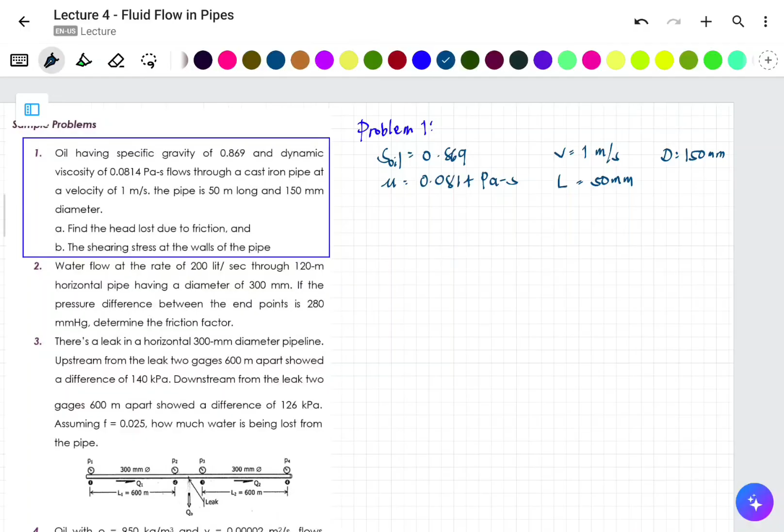Now, the first thing asked in the problem is head loss due to friction. But there are two cases for head loss due to friction: first is laminar flow, and second is turbulent flow. So first, let's find the value of the Reynolds number.

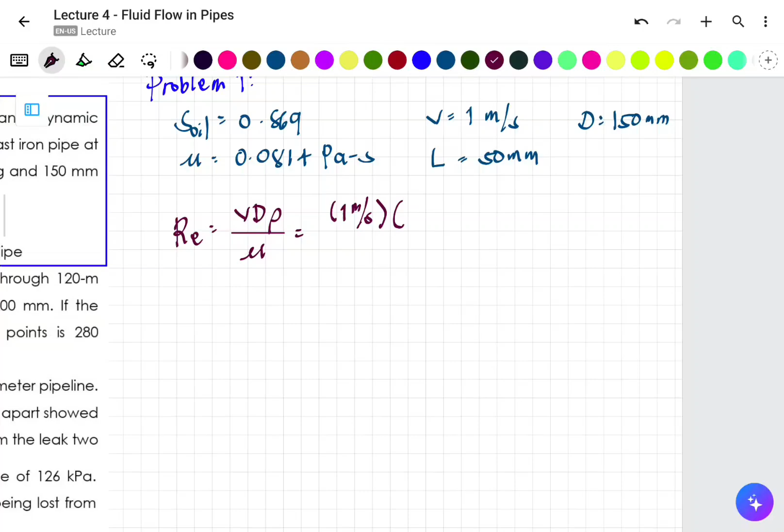The Reynolds number formula uses mu or absolute/dynamic viscosity, velocity, diameter, and density, that is V times d times rho over mu. From our previous discussion, mu is the absolute viscosity. The velocity is 1 meter per second, the diameter is 0.15 meters since the pipe is circular, multiplied by the density of the oil, which is 1000 kilogram per cubic meter for water, but we're given a specific gravity of 0.869, all over the absolute viscosity of 0.0814 pascal second.

The resulting unit here is dimensionless, because from the derivation of the formula, if we convert the values into their corresponding units like Pascal or Newton per square meter, we know that the units cancel and the Reynolds number value is dimensionless. That value is equal to 1,601.351.

That is less than 2,000, our parameter. Therefore, this is a laminar flow. For laminar flow, we know that the value of F is equal to 64 over the Reynolds number.

So F is equal to 64 over the computed Reynolds number of 1601.351. Just input this into your calculators. So to avoid rounding off too much, this is equal to 0.03... let's continue with 0.04 since it's about 0.0399-something, or 0.04, that is the coefficient of friction since this is laminar flow.

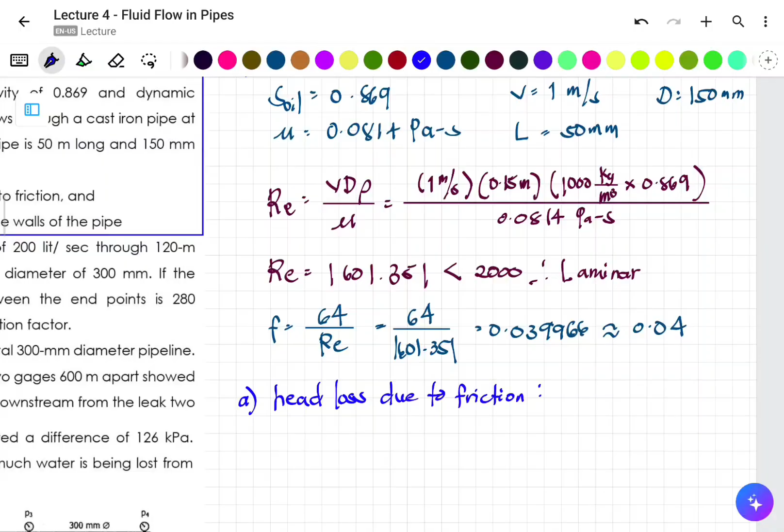Using the formula 0.0826 F L Q squared over D raised to the 5th, or we can also use the general formula. Let's use the general formula: H sub F, or head loss due to friction, is FL over D, multiplied by V squared over 2G. This is more of a direct substitution now.

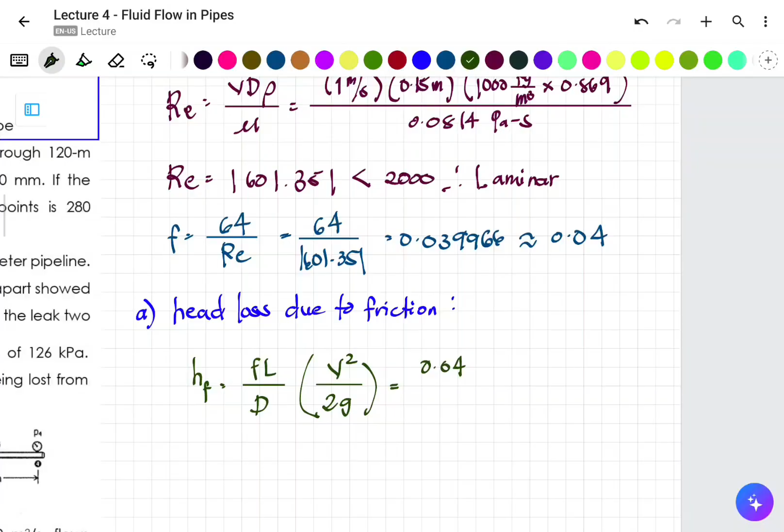Given to us, F is 0.04 - I rounded up since the decimal value is 0.0399, very close to 0.04, so it's acceptable. The length is 50 meters, over the diameter of 0.15 meters.

Multiplied by V squared, the velocity of 1 meter per second squared, over 2 times 9.81 meters per second squared. So once we compute this equation, you may use your calculator to store the value for speed.

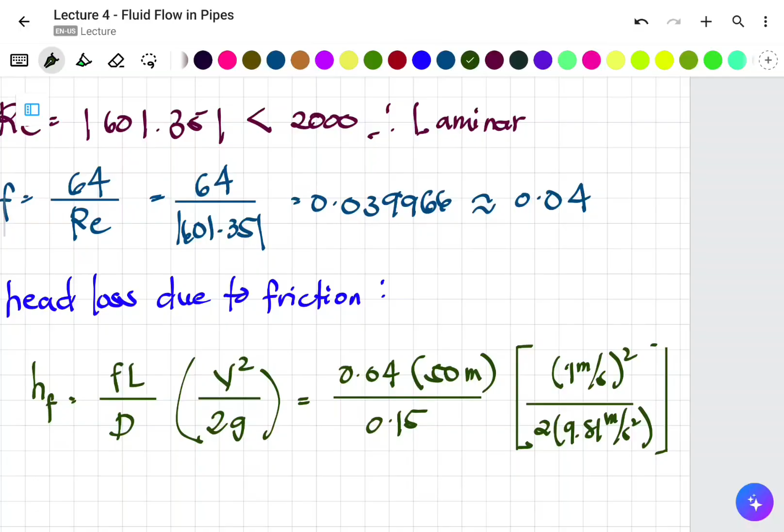If you want a value that doesn't round off, that's the catch there. It shouldn't round off. So our value for head loss, this value is in meters. So our H sub F in meters is 0.0679, or about 6, or in 2 or 3 decimal places, that's 0.068 meters. So if in millimeters, that's 68 millimeters. So that's how small it is.

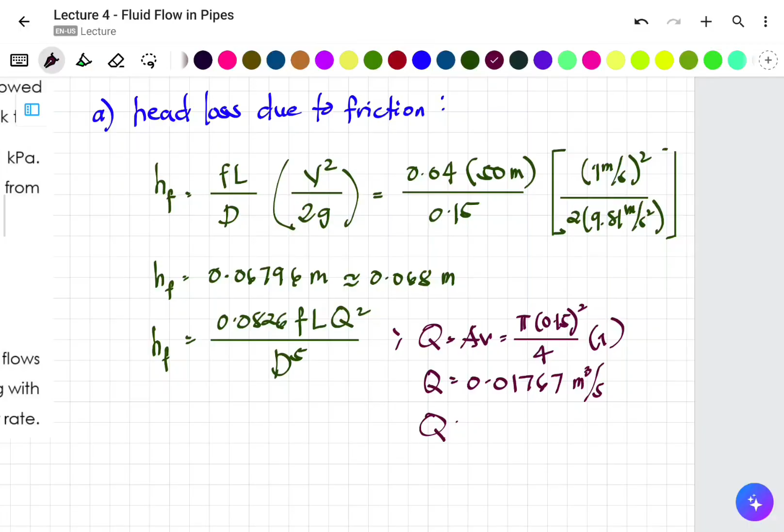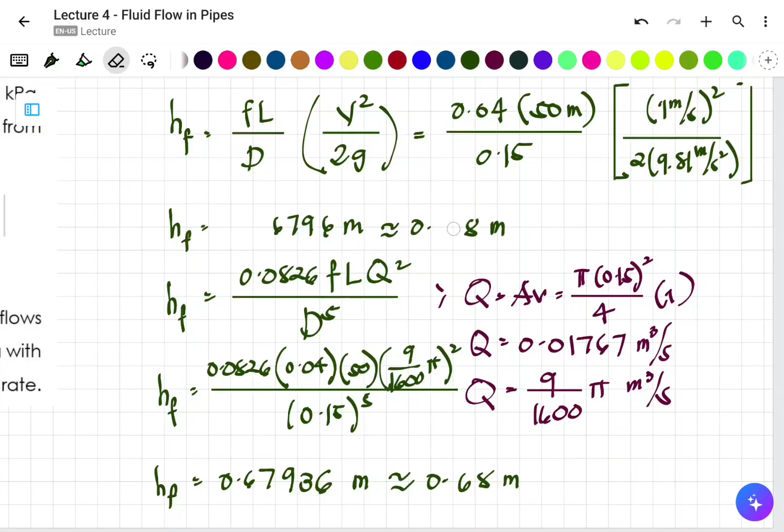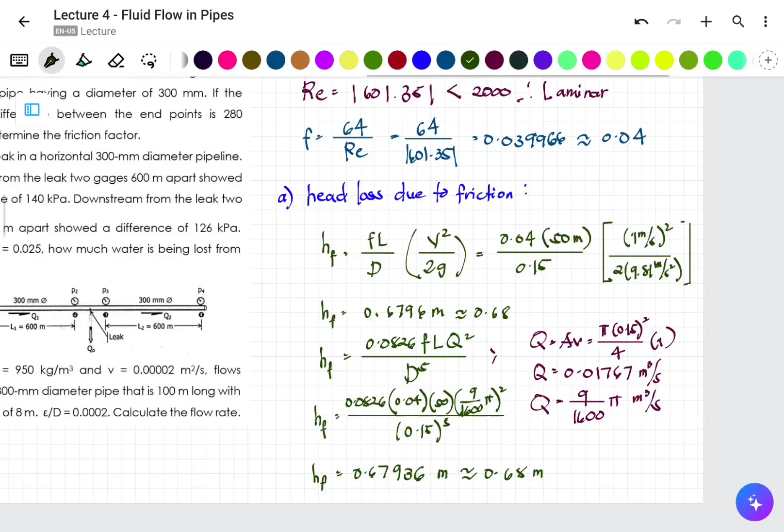Okay, so either of the two works, if you want to use our general equation, that's fine. If you want to use the equation for circular pipes, since it is circular, that also works. The only difference is you'll still need to compute the value of Q, because without it you can't go directly to our formula—if there's no Q value, you'd still need to solve for it. Okay, so same, same answer: 0.68 meters. That's for letter A.

Now let's solve for letter B. So for letter B, what we're looking for, still the same problem—now letter B: we need to find the shearing stress at the walls of the pipe. So we know that for letter B, when it's at the walls of the pipe, we use the notation tau sub O. And tau sub O, from our previous discussion, is gamma H sub L D over the denominator 4L.

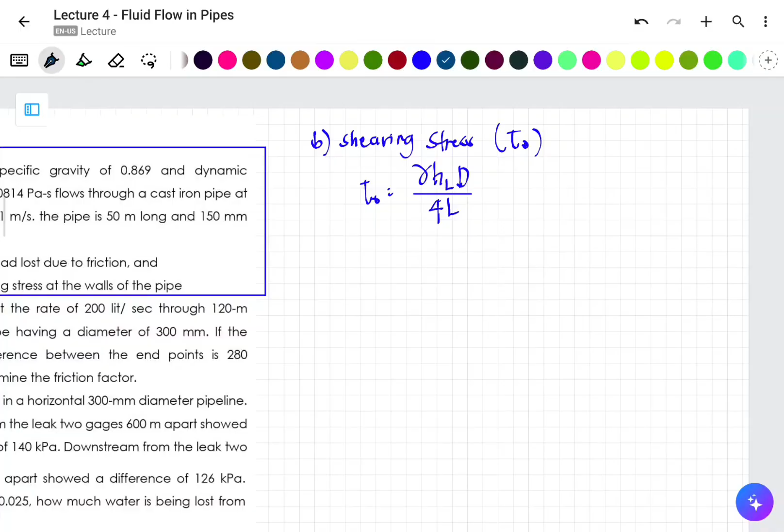So we can substitute directly. We already have the head loss, H sub L, the diameter D, L is the length of the pipe, and gamma, of course, we have the specific gravity. So substituting directly, tau sub O equals gamma, 9810 Newtons per cubic meter—you can also use kilonewtons, only your answer will be in kilopascals—multiplied by 0.869 specific gravity, times the head loss of 0.68 meters, times the diameter of 0.15 meters, over 4 times the length which is 50 meters.

Solving this equation, the value comes out to 4.34 Pascal. Now if you used 9.81 kilonewtons per cubic meter, that's in kilopascal, so you divide by 1,000: 0.00434. Okay, so that's our answer for tau, shearing stress at the walls of the pipe for problem number 1.

Okay, now let's answer problem number 2.

Water flows at a rate of 200 liters per second through a 120 meter horizontal pipe having a diameter of 300 millimeters. If the pressure difference between the endpoints is 280 mmHg, determine the friction factor.

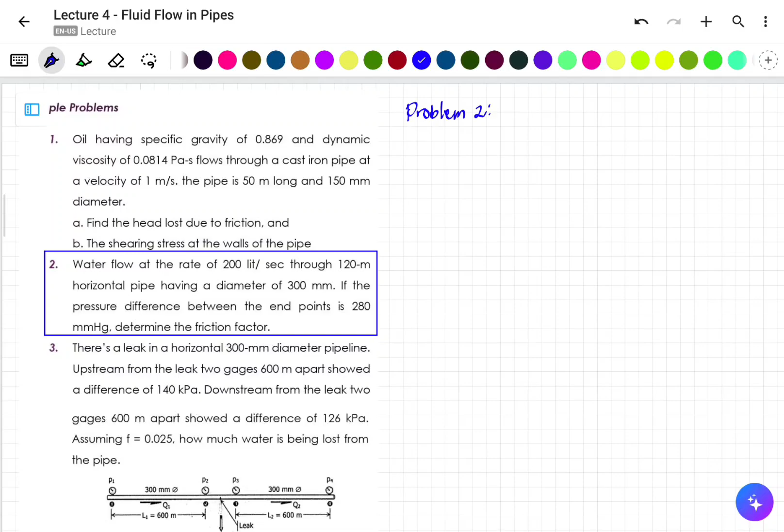For problem number 2, mukhang madali yung problem pero hindi siya madali if hindi natin matatandaan or makakalimutan natin yung mga basic principles on fluid flow. So first, let's go back a little bit. First, we should remember na meron tayong tinatawag na continuity equation. So continuity principle, alam natin na whatever enters the system or inflow is the amount that leaves the system or outflow.

Second, the Bernoulli's energy equation. Sa Bernoulli's energy principle natin, alam natin na meron tayong mechanical energies na kailangan or mga mechanical work natin. Ngayon, kapag ideal yung flow, wala tayong head loss. If hindi ideal yung flow, meron tayong head loss.

Kasi sa problem natin, ina-assume natin na meron tong head loss. Bakit? Dahil ang tanong sa atin ay friction factor. Most of the time, kung hindi binigay yung ibang parameters ng fluid, tulad ng absolute viscosity at kinematic viscosity, madalas to may head loss. Yan ay in the assumption na sa haba ng pipe, tingnan din natin ang length ng pipe. Yung length ng pipe natin ay 120 meters at ang kanyang diameter ay 300 mm. So may factor din ang haba ng pipe, 120 meters. So most probably may head loss.

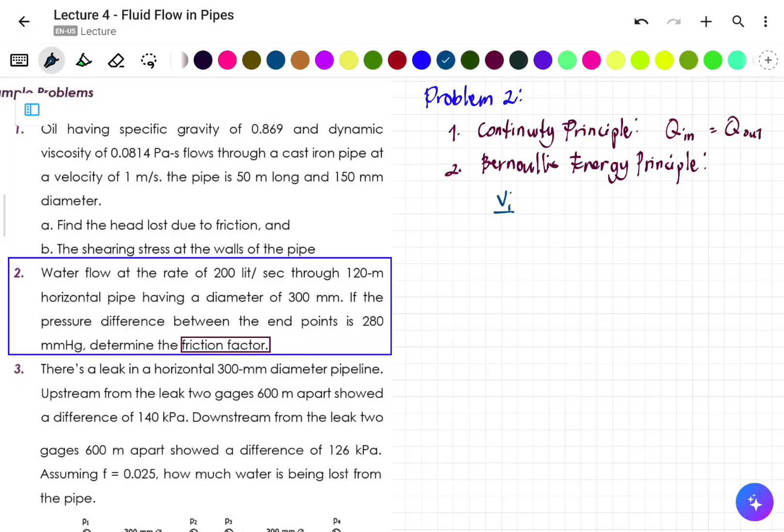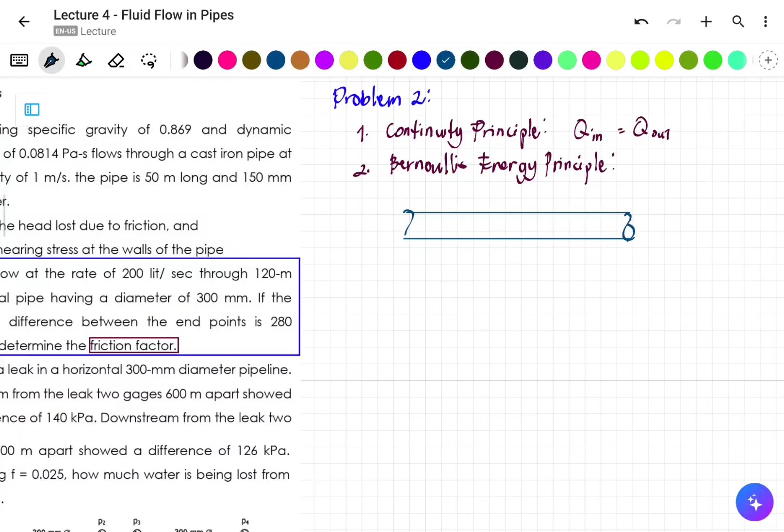Ngayon, ano ba ang formula o ano ba ang natatandaan natin kapag Bernoulli's energy principle? Sabi natin, yung kinetic energy ay V squared o V sub 1 squared over 2G. Kung meron tayong dalawang points sa pipe, i-drawing natin. Ito yung pipe natin, end to end. Ito yung point 1, ito yung point 2. From point 1 to point 2, yan ay V sub 1 squared over 2G, plus P sub 1 over gamma, plus Z sub 1, minus yung ating head loss.

Ngayon, kung gusto niyo nasa kabila yan, kasi yung head loss ay from point 1 to point 2. Pwede naman siyang plus head loss kasi magkakaroon ng friction, effect of friction. Dahil may friction effect, may head loss. Is equal to V sub 2 squared over 2G, plus P sub 1 over gamma, plus Z sub 2. Wala namang binanggit sa problem na merong pump or whatsoever.

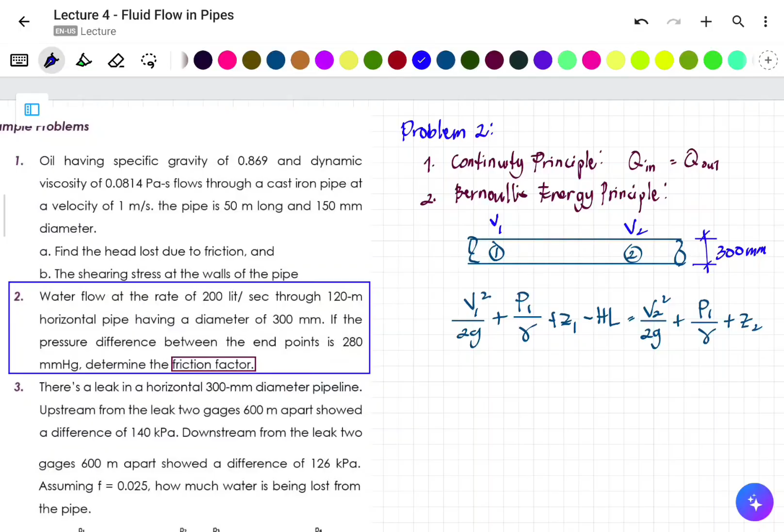So ito gagamitin natin. Ngayon, since we are using continuity principle, isa lang ba yung diameter ng pipe sa problem? Kung titingnan natin, sabi sa atin sa problem, ang diameter daw ng pipe given sa problem ay 300 mm. Ibig sabihin, kung 300 mm yan, yung velocity din ng pipe mo sa unang point, your V sub 1 and V sub 2 are equal. So using the equation ng Bernoulli's energy principle, di mo wala na to. Maka-cancel out na natin.

Subtracting both sides with the same kinetic energy head. Ano pa? They are lying on the same line of action. Ibig sabihin, yung gitna o yung consideration natin, tulad ng naidiskusa natin, kung nasa iisa yung kanyang line of action natin, yung Z elevation natin o elevation energy head ay equal o both are equal to 0 kasi sinet mo yun yung datum mo. Kung itinakda mo itong datum mo, o kahit saan ka nag-set ng datum, equal sila, o 0, pwede rin.

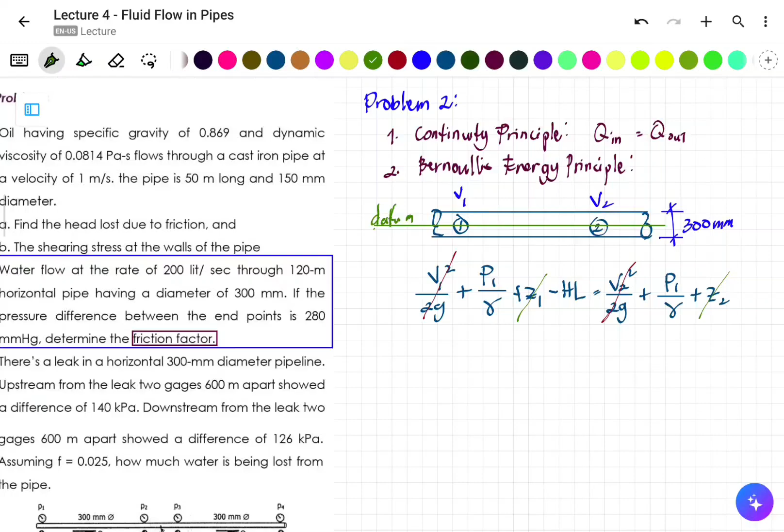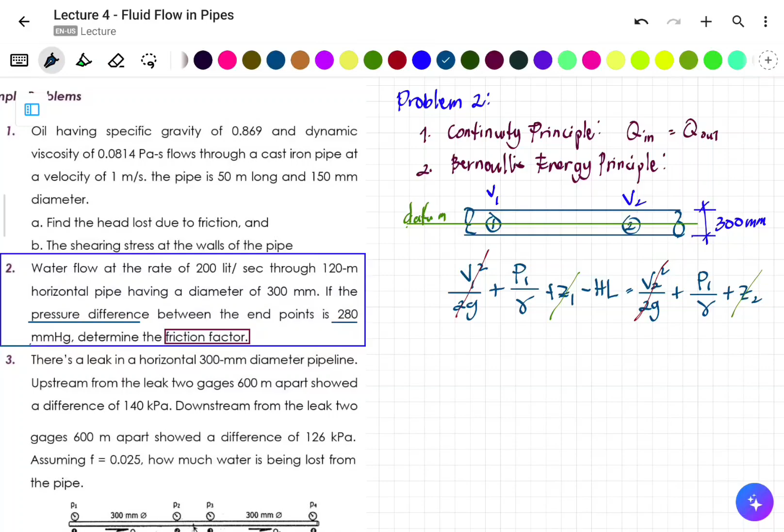Ano pa? So may iwan na lang talaga ay yung pressure difference. Binanggit siya sa problem, ang sabi sa atin, ang pressure difference daw, so let's rewrite this equation. Ang pressure difference daw between 2 points, nakalagay dito, pressure difference between end points, just like in this case, point 1 and point 2, is 280 mmHg. Ngayon, walang binigay sa atin ang value o specific gravity ng mercury. Just like sa ating fluid mechanics o fluid statics, let's assume na this specific gravity is the usual value ng ating specific gravity ng mercury, which is 13.6. So let's rewrite first this equation.

This will become P sub 1 over gamma minus P sub 2 over gamma is equal to the head loss. O gawin na lang natin H sub F kasi this head loss is caused by friction, so friction loss to. Friction losses siya. Meron daw difference, ang pressure difference ay P sub 1 minus P sub 2. Sabi sa atin, P sub 1 minus P sub 2 is 280 mmHg. Ayan yung binanggit sa atin na pressure difference.

Kung gumamit tayo ng pressure mmHg, ibig sabihin may kinalaman ito sa fluid kung saan siya nag-base, in this case mercury. So ibig sabihin ito dapat ay merong gamma. Okay? So yan yung ating binabanggit sa atin na 280 mmHg.

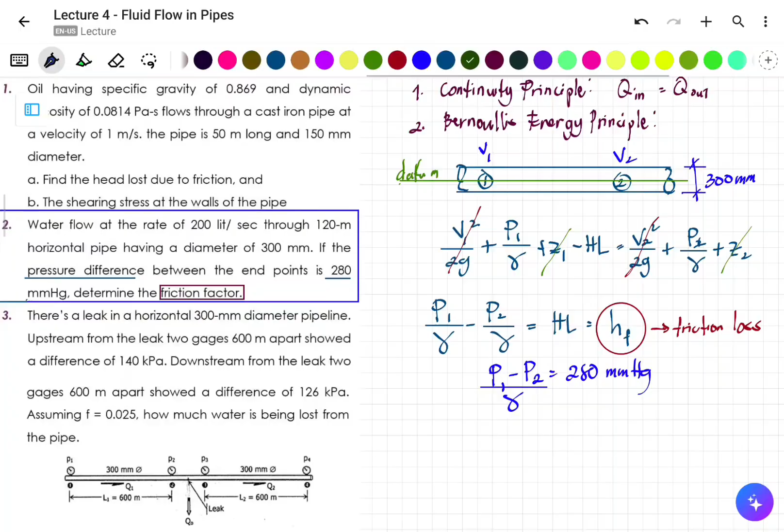So if that's the case, pwede natin ituloy ito, head loss H sub F is equal to P sub 1 minus P sub 2 over gamma na equal sa 280 mmHg.

And the specific gravity of Hg or mercury is 13.6. Again, kung hindi siya binigay, ito ang gagamit natin, just like water na 1. Ito kasi yung value na average value ng ating specific gravity.

And this value, para sa kalaman ng lahat, this is the specific gravity of mercury. So madali na sa atin to. Kapag meron tayo nito, o binigay, masasolve na natin.

So this is head loss is equal to 280 times 13.6. It will give us a value ng head loss natin. Okay, so if you multiply that, 280 times 13.6, lalabas sa atin is 3,808 mm. Ngayon, ano tong fluid na to?

This is the head loss, since ni-multiply natin siya sa specific gravity, mm of water. Okay? So millimeters of water na siya. Ngayon, sabi natin sa formula natin, yung H sub F is equal to 0.0826 FL Q squared over D raised to 5.

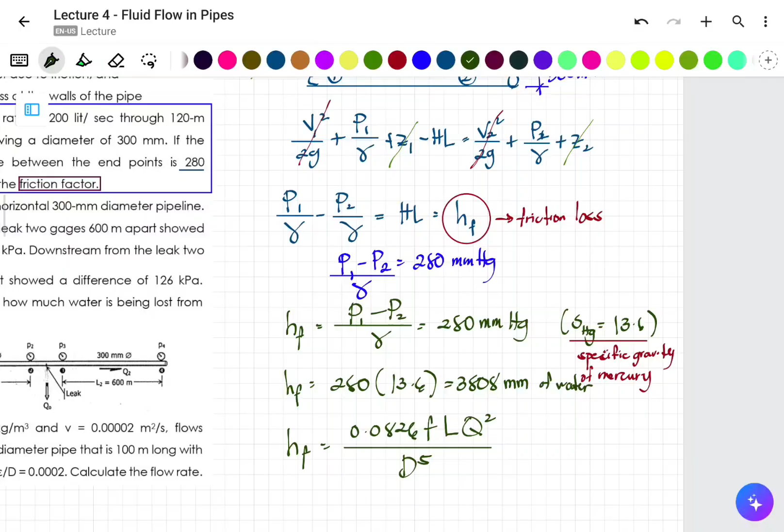Ayan. Or pwede rin yung kanina natin equation, na binigay, pwede rin yun kung meron tayo yung original equation. Pero kasi dito sa problem na to, mukhang binigyan tayo ng flow rate, ano daw, 200 liters per second.

So magagamit na natin to. Ngayon, alam natin na kapag nilagay natin itong equation sa SI unit, ang resulting unit dapat ito ay meters. So i-convert na natin to into meters. So that means this will become 3.808 meters is equal to, ayan.

0.0826 F, ito yung hinahanap natin, this is the unknown, iba natin yung kulay. So F, multiplied by L, ang length natin binanggit sa problem ay 120 meters.

So 120 meters times the discharge. Ang discharge natin is 200 liters per second. So para ma-convert into cubic meter, divide natin sa 1,000, kasi alam natin na 1,000 liter is 1 cubic meter. This will become 0.2 cubic meter per second, naka-squared, over diameter natin 300 mm, 0.3, raised to 5. So this will be our equation.

So tip lang, huwag nyo nang shift-solve yung inyong calculator sa values niyo, kasi pwede nyo naman siyang idiretso, talagang ty-type nyo lang sa calculator ninyo. Okay, kasi kung shift-solve nyo pa yan, tatagal ang inyong solution.

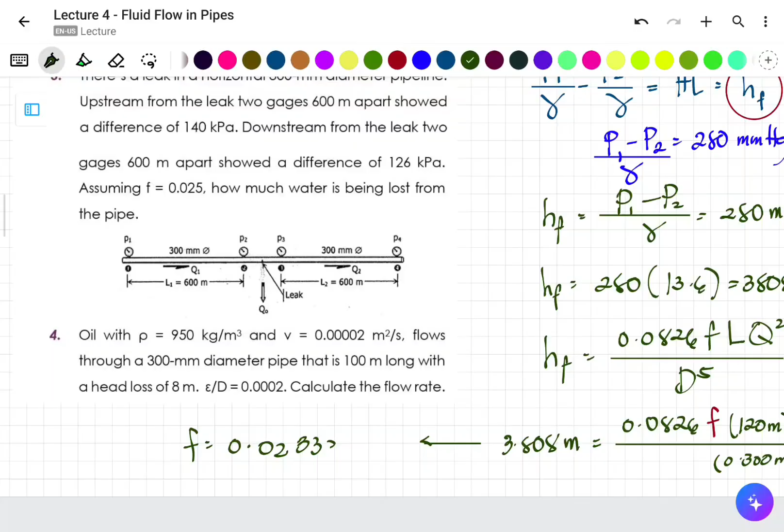So your value of F, dito ko nalalagay. So therefore, your value of F, based on this equation, dito ko nalalagay sa gilid. Kung tutuloy natin, your F is equal to 0.028339. So kung depende sa required value ng decimal places, ayan yung sagot, 0.028339. Okay, so dimensionless yan kasi yan ay factor, a friction factor.

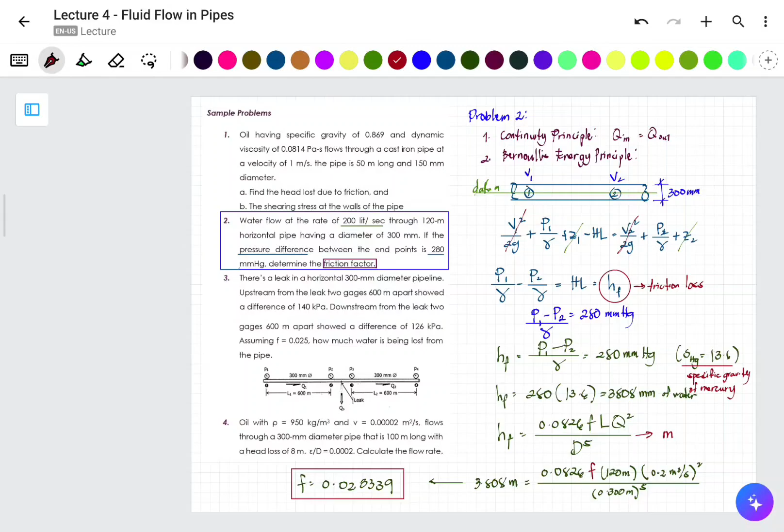Okay, so now let's answer problem number 3. There's a leak in a horizontal 300 mm diameter pipeline. Yan, so ito yung haba ng pipeline na yan, indicated yung mga parameters.

Upstream from the leak, 2 gauges 600 m apart. Yung upstream, ito po, ito yung ating upstream. So that is 140 kilopascal, sabihin yung difference ng pressure sa pagitan ng P1 and P2, may gauges na nilagay dyan, is 140 kilopascal.

Downstream from the leak, ibig sabihin ito naman sa kabila, ito yung downstream, itong side na to. From the leak, 2 gauges 600 m apart din, which is P sub 3 and P sub 4, just illustration, show the difference of 126 kilopascal. So may reading, in between gauges, doon sa length na yon.

So yan yung setup. Assuming that the coefficient of friction is 0.025, how much water is being lost from the pipe? Gano'n daw kadami yung nawala? So ito yung leak actually. Gano'n daw kadami yung leak na yan? Okay, so yun yung tanong.

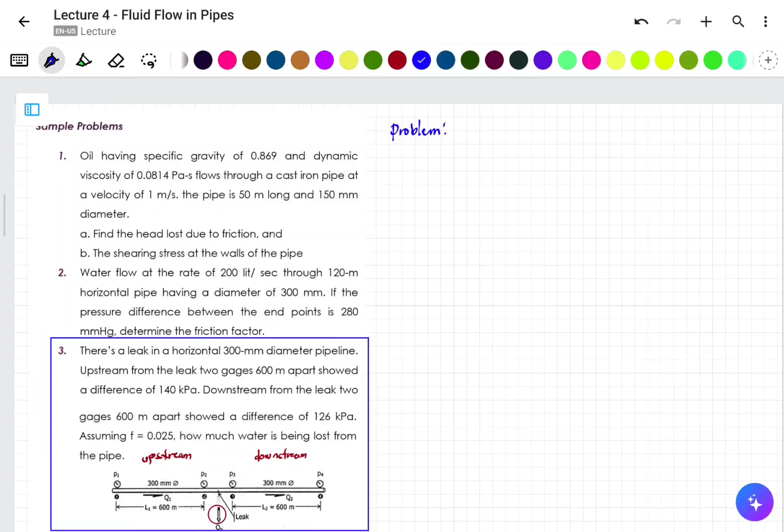So in problem number 3, to solve this problem, we have to dictate what will be the final solution na in-expect natin. So if ang hinahanap sa atin dito sa problem na to ay leak, o how much water is being lost, sabihin yung leakage. So from this illustration, applying continuity, we could say that the discharge at the first system between two gauges P sub 1, P sub 2...

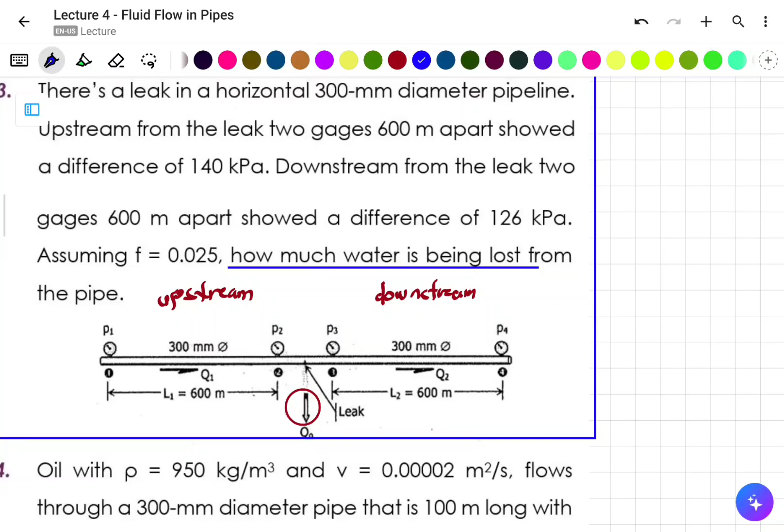...is equal to the discharge na dumaan dun sa pagitan ng dalawang gauges na P sub 3 at P sub 4 plus the leakage. That means we have this equation: Q sub 1 is equal to Q sub 2 plus the leak. So ito yung ating leak, Q sub D, o ano na lang, L na lang, Q sub L, yan gawin natin Q sub L. Ibig sabihin, meron tayong discharge na leak. So this is the leak, o yung amount lost. Okay?

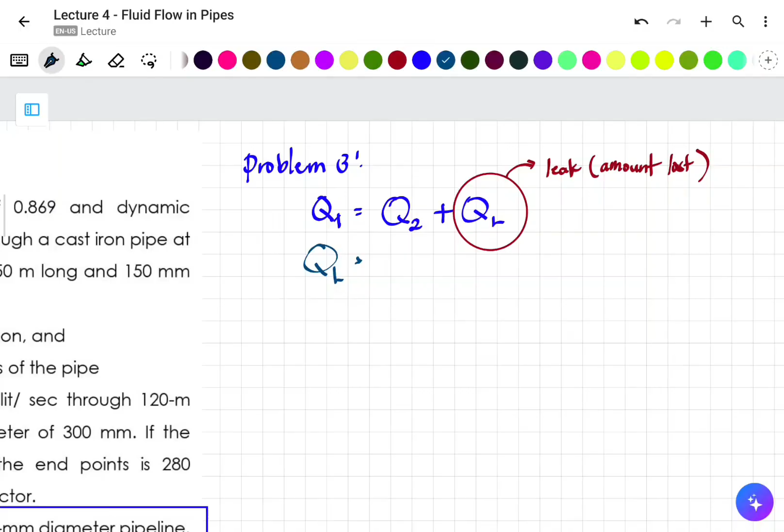Ayan, so ito yung ating final formula. Therefore, kapag nire-write natin yan, sabihin yung amount lost or leak, this will be equal to Q sub 1 minus Q sub 2. Okay? So from that formula, kailangan makompute natin ang Q sub 1 and Q sub 2.

So paano yun? So ano ba yung binigay sa atin? Given sa atin yung binigay sa atin is the coefficient of friction. If given ng coefficient of friction, para makompute natin ang discharge, at given din naman yung diameter, so same, 300 mm daw yung diameter at merong mga given na lengths.

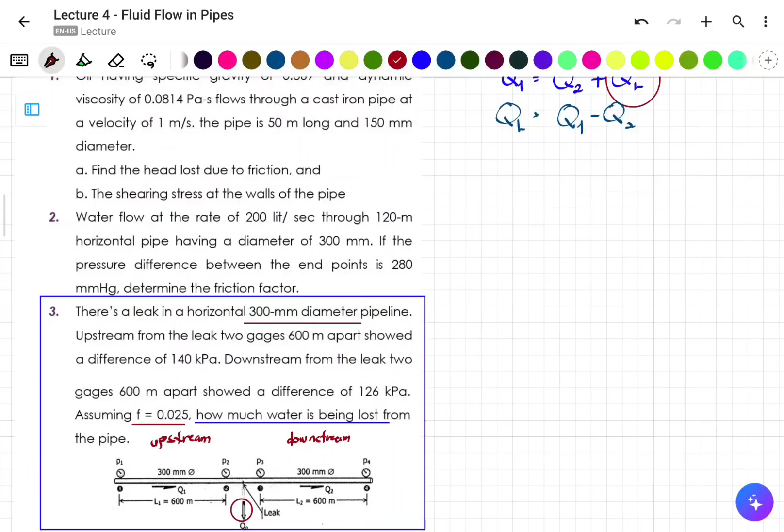So I think we will resolve using Darcy-Weisbach equation on circular sections. So the formula that we're going to use is this one: head loss is equal to 0.0826 FL Q squared over D raised to 5. Again, this formula only applies to circular section, okay? Circular section, tapos SI unit, okay? Dahil nga ginamitan natin to ng G na 9.81 meter per second squared.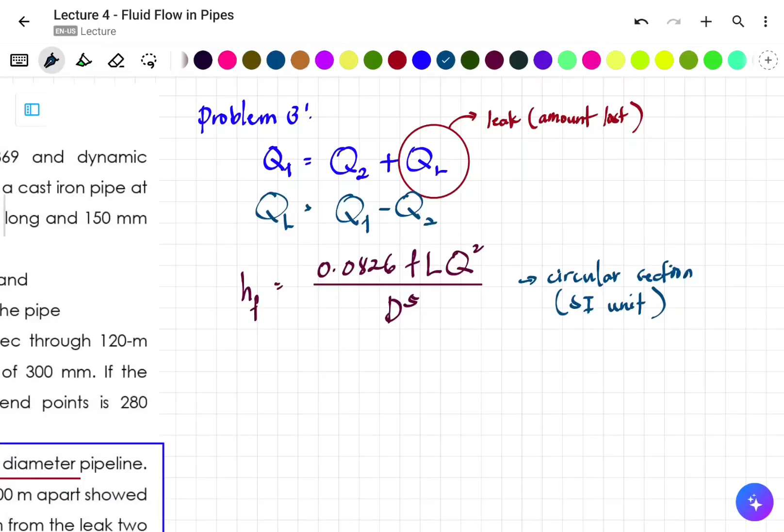Okay, so tingnan naman natin yung given. So binigay ba? So 300 mm, okay, diameter ng pipe. Yung F natin is, yung ating length is naka-meters and kilopascal yung mga pressure. So okay, magagawa natin yon.

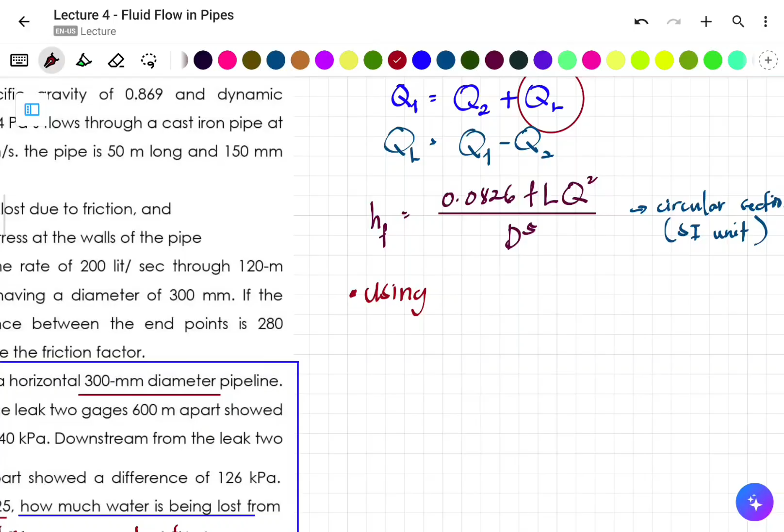So from the previous, din natin, this problem, or using Bernoulli's energy equation, so inote natin. Using Bernoulli's energy equation, or BEE, okay, and alam natin na may head loss to, we could say from that equation, we could derive that the head loss, which is equal to the head loss due to friction, is equal to P sub 1 minus P sub 2 over gamma. Okay? General equation yan. Okay? Ibig sabihin, ito yung ating equation for the head loss. So this is equation of head loss from BEE. Ayan.

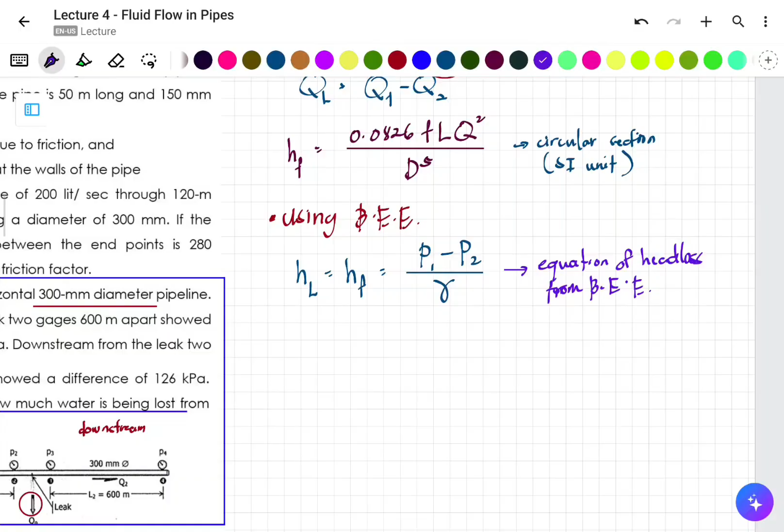So considering yung ating mga mechanical energies, no? That is the velocity, ano pa ba? Yung ating energy elevation, elevation energy, and the potential energy, no? Yun, so potential energy and pressure energy. In this case, mukhang pantay naman, straight line.

So ang gagamitin na lang natin, may iwan na lang, is pressure difference, which is binigay na sa atin using yung mga gauges. So sabi sa atin kanina, yung isa 140 kilopascal, yung isa 126 kilopascal. So madali na sa atin mag-solve.

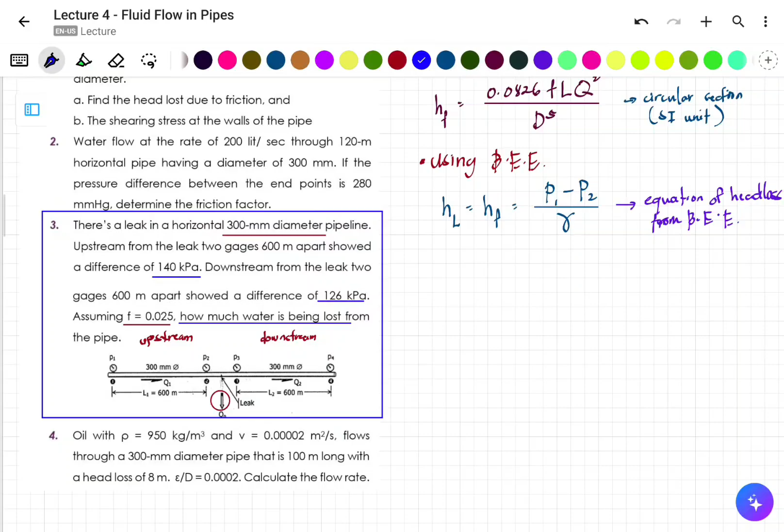Okay, but first things first, let's compute, no? For the equation of head loss, gamit naman yung ating coefficient of friction. Okay? So H of F is equal to, sabi sa atin dito, 0.0826. Ano yung friction natin? 0.025 multiplied by length. So same yung mga length, 600 meters. Ayan, so times Q, di natin alam, so Q squared, ayan, di natin alam diba? Over, yan, D, diameter. So parehas may diameter, parehas, no, 0.3 or that is 300 mm.

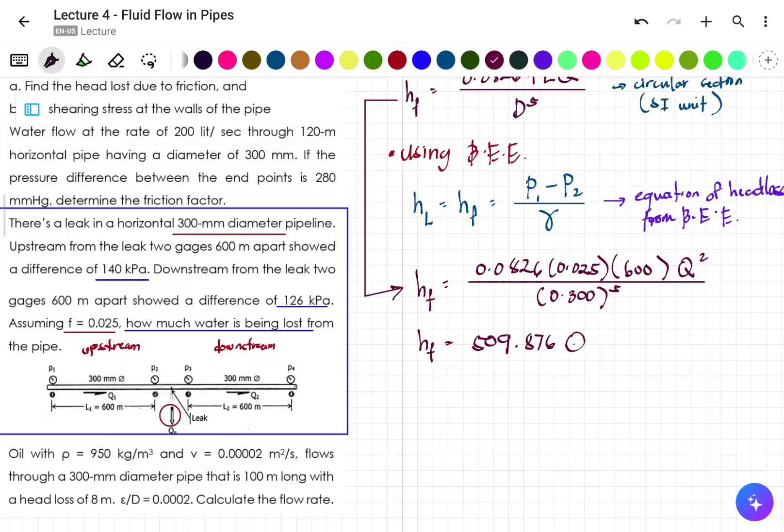So again, if we want to solve this equation, so magkakaroon tayo ng head loss in terms of Q, no, yun yung magsasolve natin. This will become, the value of head loss is equal to 509.876 Q squared. So this will be the equation of head loss. Yan, lagay natin, kasi dalawa equation of head loss, diba? Equation naman to ng head loss from friction. Okay? Or using friction.

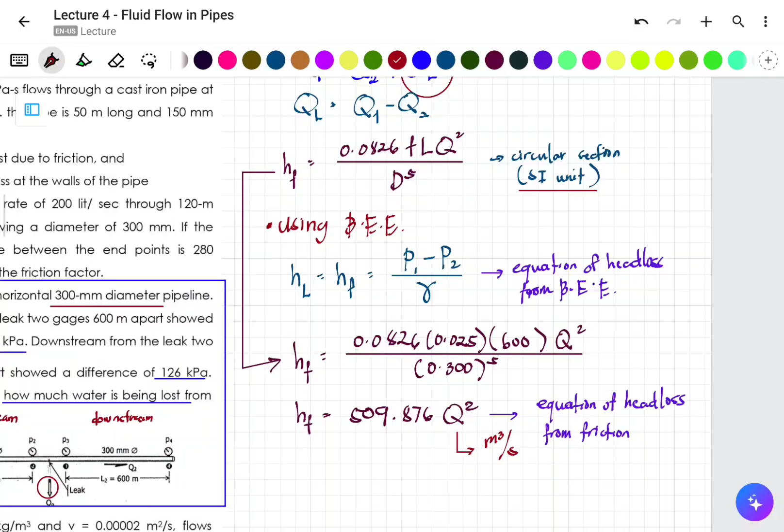So ayan, so ngayon, itong Q na to, na masasolve natin dito, if this is in SI unit, tandaan natin ha, SI unit na circular, so this will become, ang unit ito is cubic meter per second. Okay? In that sense, pwede natin makompute ang mga values ng Q sub 1 and Q sub 2.

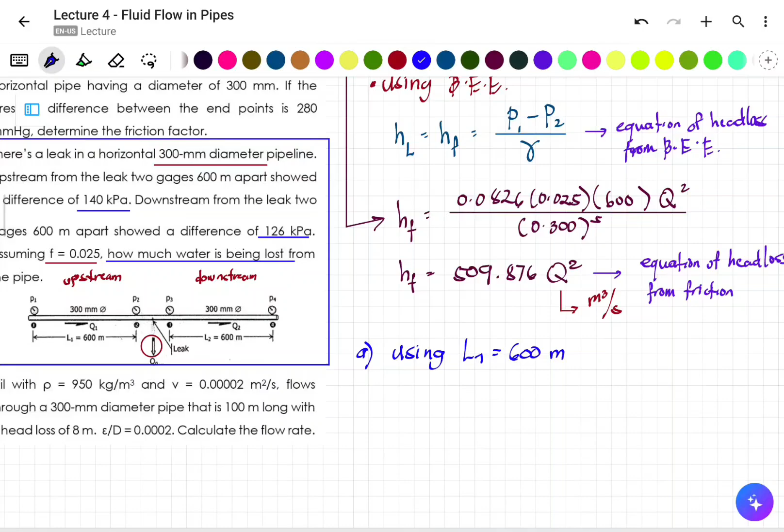Paano? So let's start by analyzing, or should I say, umpisa mo natin sa using L sub 1 na merong 600 meters. Ayan, so ano nga ulit ang head loss nila for using BEE? Sabi sa atin, using BEE, head loss is equal to, ano daw yung difference between pipe gauges P sub 1 and P sub 2? That's 140 kilopascal, or pwede natin gamitin, tawag dito, pwede na tayong gumamit ng Pascal, pero in this case, no, i-retain na lang natin sa kilopascal. Okay? So tingnan natin mabuti.

Yun nga lang, kailangan natin tandaan, no, na yung ating Q, or should I say tama, yung ating Q doon, okay, ay naka-cubic meter per second. So this is 140, yan, kilopascal. Okay? Lagyan natin, okay, iglagay mo natin yung formula, that is P sub 1, okay, minus P sub 2 based dun sa given, no, over gamma.

Kung gagamit tayo ng 140 kilopascal, dapat this is kilonewton per cubic meter. So this is 9.81 kilonewton per cubic meter. At ang result unit dito, ano lalabas sa sagot? So lalabas dito ay meter. Okay, meter na. So etong H sub F na to, pwede natin i-substitute doon sa formula natin.

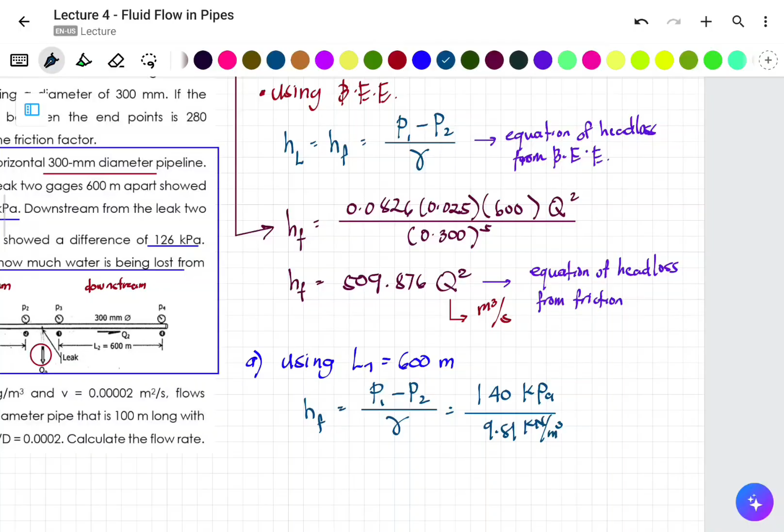So this will become, ano din, 509.876 Q sub 1 squared. Bakit? Kasi gumagamit tayo ng L sub 1. Therefore, Q sub 1 natin will be equal to 0.167 cubic meter per second. Yan yung ating discharge sa una.

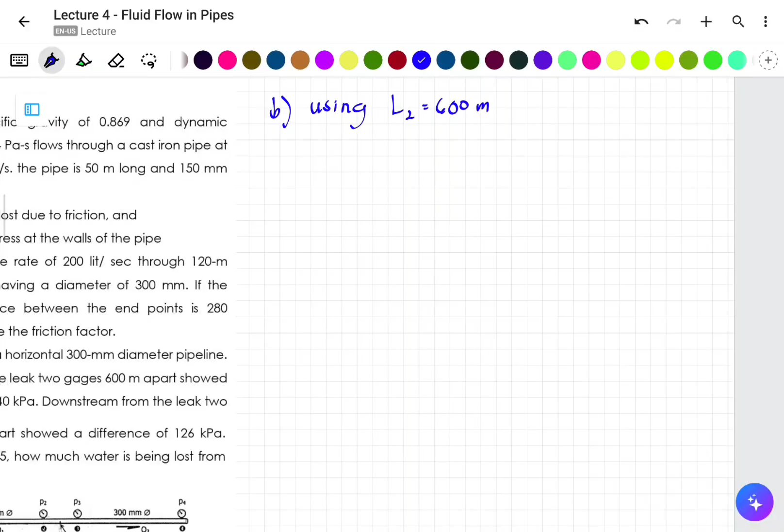So meron na tayo, check na natin itong discharge na to. Next natin, alamin natin yung Q sub 2. Sige, lipat tayo ng page. This time, gamitin natin yung length sub 2 na meron din 600 meters. Ito pa rin yung given natin, same na same. So, length sub 2, ganun pa din.

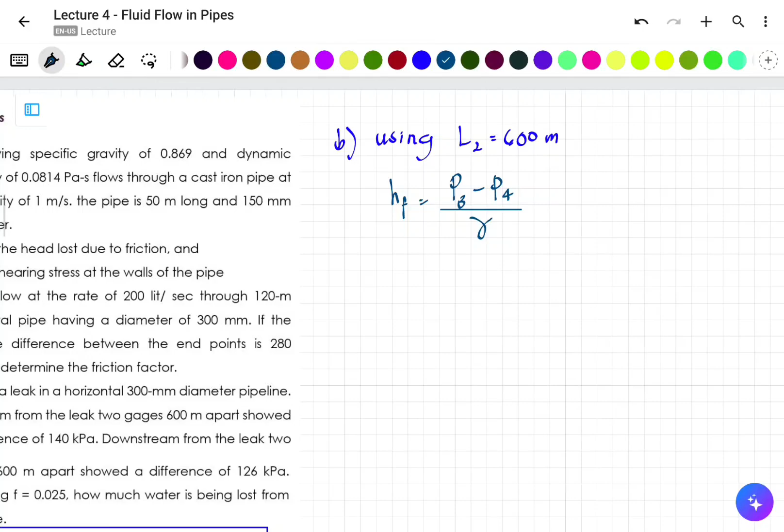So using yung ating head loss, using naman yung ating difference ng P sub 3 at P sub 4 over gamma, gamit naman yung dalawang gauges. Sabi sa atin, that gauges cause a difference of 126 kilopascal. Ito yung downstream, diba? So this will become 126 kilopascal, usad natin.

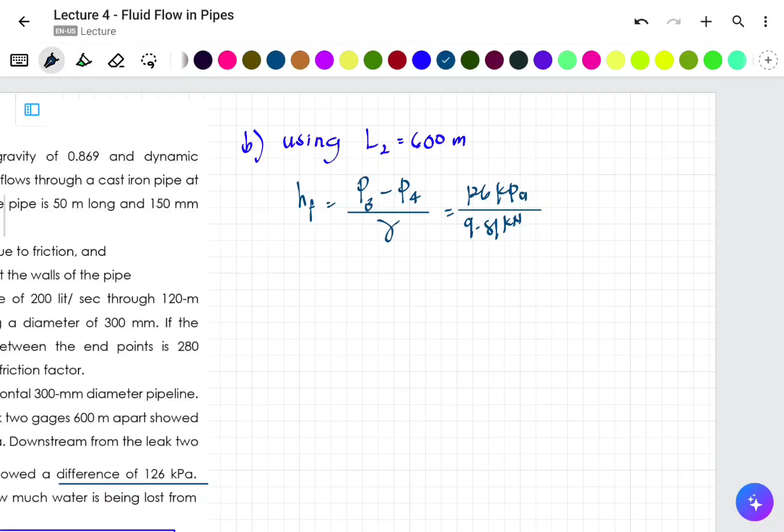126 kilopascal over, kung kilopascal yon, dapat ang gamma mo is 9.81 kilonewton per cubic meter. Na equal din sa, ano nga ulit yung formula natin? That is 509.876 Q sub 2 squared, kasi yun yung general equation natin. So, 509.876 Q sub 2 squared. Therefore, meron tayong makakompute na Q sub 2, na equal sa 0.159 cubic meter per second.

So to solve for our loss, Q sub L is equal to Q sub 1 minus Q sub 2. So yung ating leak, our loss, amount loss is 0.167 cubic meter per second minus 0.159 cubic meter per second. It will give us a value of 0.008 cubic meter per second.

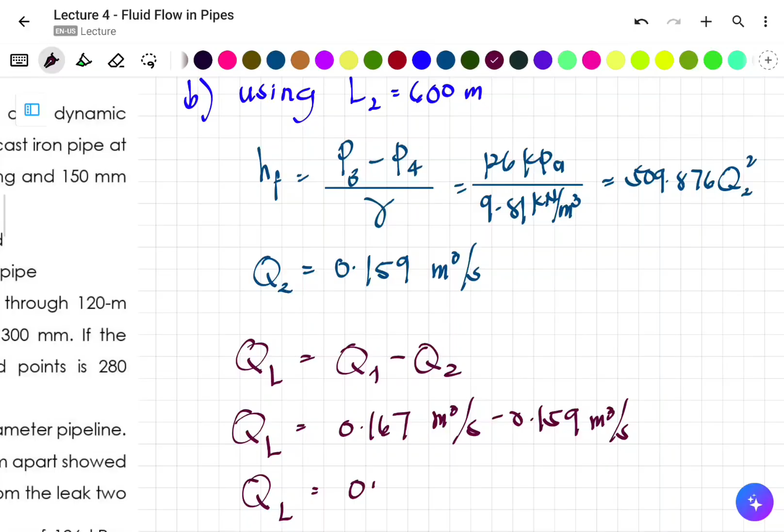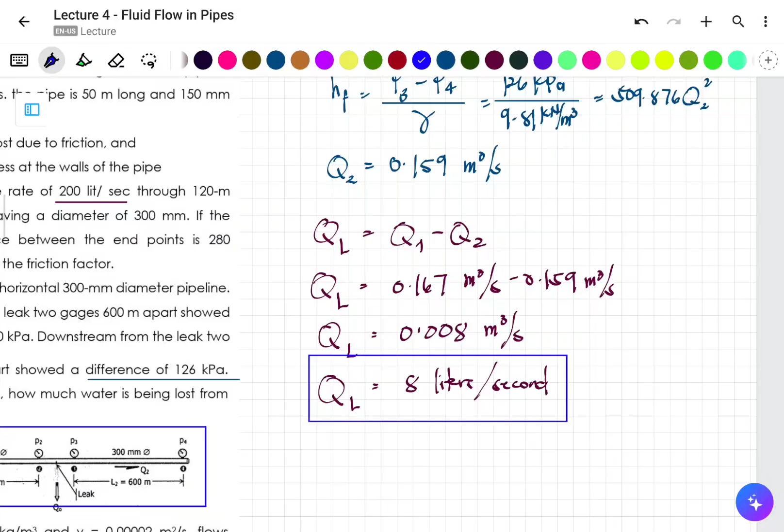Ngayon, since we are dealing with fluids or specifically water, katulad kanina, kung mapapansin niyo yung previous problem natin, ang binigay sa atin ay liters per second. Kasi usually maliliit yung value, or kahit malaki siya, liters, kasi yun yung usual na tingin natin sa volume, hindi cubic meter. So that's equal to 8 liters per second. Okay, so that is the answer for this discharge. Pwede pa rin naman yung cubic meter per second, pero dahil fluid to, liters per second yung ating unit na gagamitin. So this for problem number 3.

Okay, now let's answer problem number 4. So oil with density equal to 950 kg per cubic meter and kinematic viscosity of 0.00002 square meter per second flows through a 300 millimeter diameter pipe that is 100 meters long with a head loss of 8 meters. If the relative roughness or epsilon over d is 0.0002, calculate the flow rate.

So in this problem, ito yung problem na yun, binigay sa atin lahat ng mga givens na pwede nating magamit. So let's write those given para makita natin kaagad.

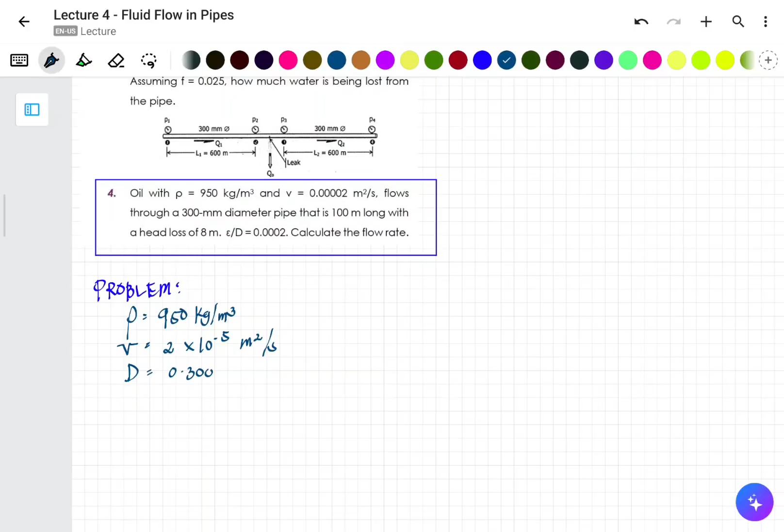So the density of oil binanggit is 950 kg per cubic meter. Binanggit din sa atin yung kinematic viscosity, gawin na natin in scientific notation, 2 times 10 to the negative 5 square meter per second. Binanggit din sa atin yung diameter ng ating pipe, that is 300 millimeters or 0.300 meters. Then the length is 100 meters with a head loss na 8 meters. Relative roughness daw, epsilon over d is equal to 0.0002, or pwede rin equal din to sa 2 times 10 to the negative 4. This is dimensionless kasi ratio ito.

Ang tanong sa atin is, calculate the flow rate. Remember, when we are going to solve for the flow rate, ang alam natin, ito yung ating kailangan isolve. So tingnan natin. So ang kailangan natin isolve, actually, is the flow rate. Ito yung unknown natin, o yung pinapahanap sa atin rather, okay, yung kailangan sa ating ipasolve.

Q is equal to AV. Ano-ano nga ulit to? So this Q is the flow rate, pwede siyang in cubic meter per second, pwede rin in liters per second, depende. Ngayon itong A, this is the area or cross-sectional area, and this V is the mean velocity. Area natin is square meter, velocity natin is meters per second. Yan yung ating mga kailangan isolve.

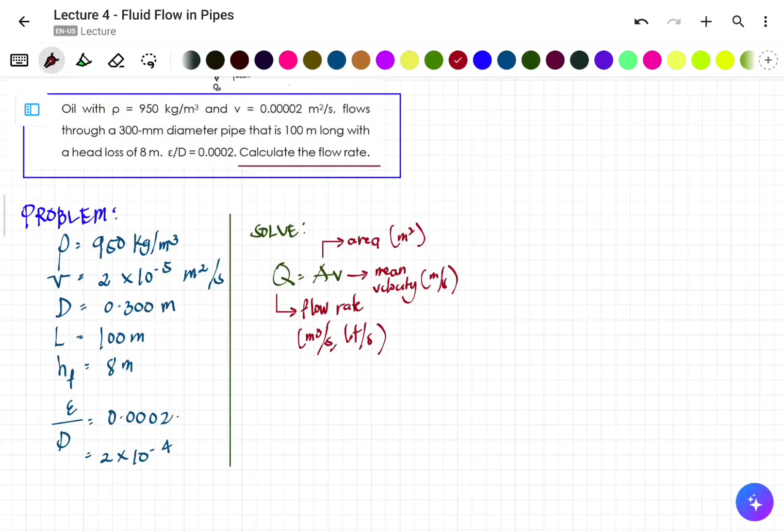From this problem, meron na ba agad tayo masasolve dito? Kasi ito yung kailangan natin. Dapat umabot sa point na masasolve natin ito.

Q is equal to AV. Sa Q ba, meron na ba tayo masasolve? Wala, yun yung unknown eh. Pero yung area, pwede, we could actually compute for the area. Itong area natin, A is equal to pi d squared over 4. So meron na tayong area, kasi meron tayong diameter, so masasolve natin yon, we could actually solve for that. Pero yung V, the mean velocity, wala.

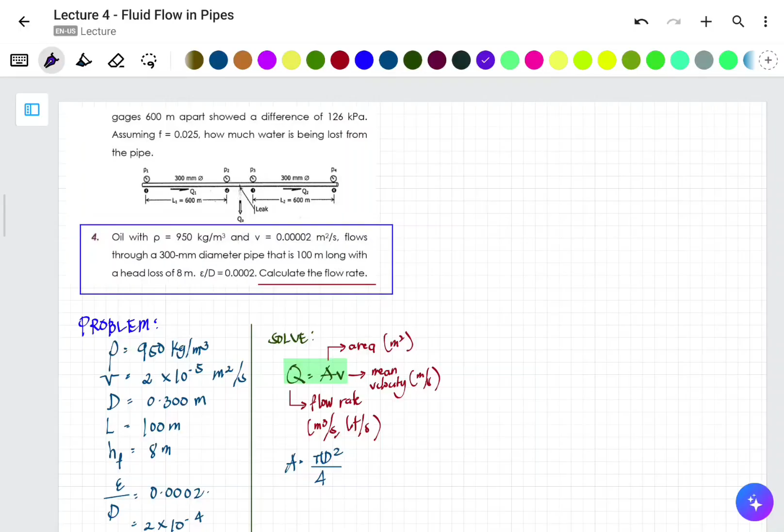Ngayon, ang tanong is, saan natin kukunin yung mga parameters na yon, o saan natin kukunin yung mga values na yon? So remember, meron tayong formula na gagamitin. Looking at the given, binigyan tayo ng this what we call relative roughness. Yung relative roughness is ginagamit sa Colebrook equation using yung Moody chart.

Balikan natin. Sir, nasaan ulit yung Moody chart? Ito, so yung Moody chart, may kinalaman yan dito sa roughness ng pipe, and the value of the Reynolds number. Dito, sabi sa atin, relative roughness daw ay ito. I-highlight natin. So ito yung ating relative roughness, nakikita ba?

0.0002. Ang problema ay, hindi naman natin alam kung saan papalo yung value ng ating Reynolds number. Hindi mo rin alam, hindi mo alam yung Reynolds number, unknown sa'yo, kasi wala ka pang velocity. Diba? Rho dV or rho dV over mu, or Vd over nu. Wala kang velocity, so unknown. Unknown din sa'yo yung friction factor kasi wala kang velocity, hindi mo mapaplat, hindi natin makikita.

Pero may heads up ka na dapat yung friction factor mo ay maglalaro lang sa mga values na to. Ilan yan? From 0.002 to 0.025, o 0.00 to 0.025. So nandyan yung value ng friction factor mo. Medyo malaki pa din dahil kada point something, is of importance sa klase ng pipe. Kasi kung titignan nyo, kapag gumalaw na yung inyong friction factor, gumagalaw din yung inyong Reynolds number. Ito ay naka-scale ng ano ba to?

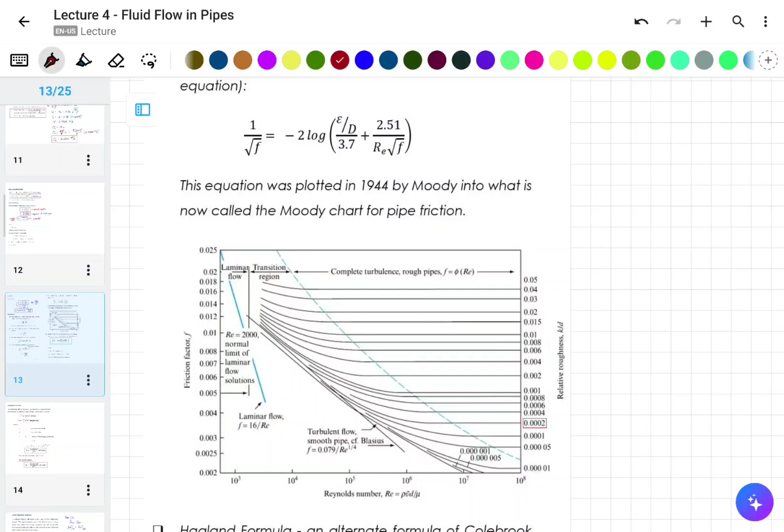Linear, or tama, linear scale. Pero yung Reynolds number, yung relative roughness and friction factor, logarithmic. Kasi dito galing yan, sa formula natin ng Colebrook na pinlat ni Moody. Ang problema, wala tayong binigay na plotting.

So pupunta tayo dito sa equation ni Haaland. Yung Haaland formula, yung gagamitin natin. Which is yung 1 over square root of f is equal to negative 1.8 logarithm of 6.9 over RE plus the relative roughness epsilon over d over 3.7 raised to 1.11. So ganyan yung ating solution.

Balikan natin yung problem. So tandaan, meron tayong isang formula na gagamitin. Ano nga ulit yun? The Haaland formula. So gagamit tayo ng Haaland formula.

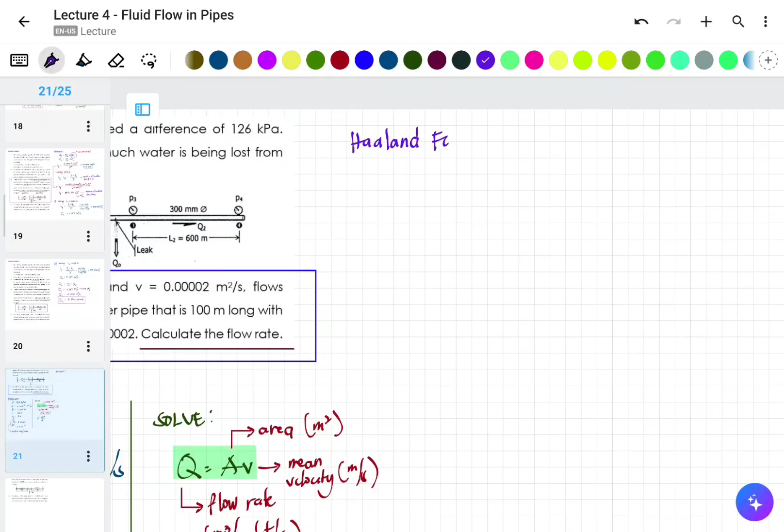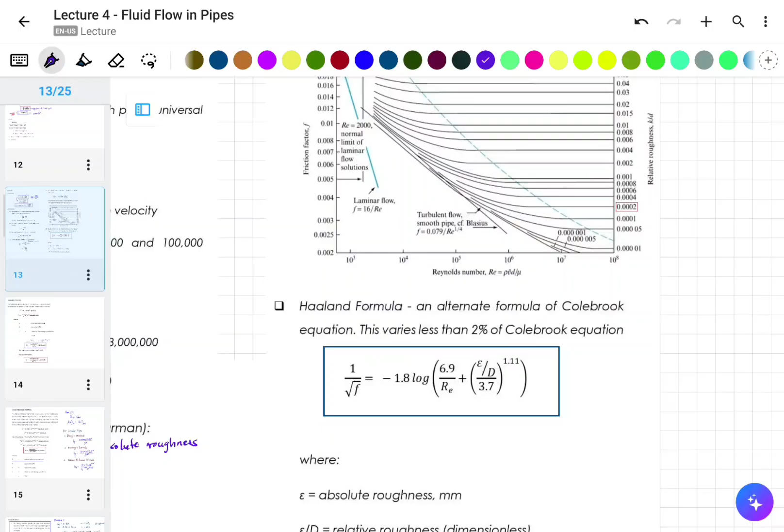Ano nga ulit? Ang Haaland formula, ito, balikan natin. That is 1 over square root of F is equal to negative 1.8 logarithm of 6.9 over RE plus epsilon over D over 3.7 raised to 1.11. Okay, i-rewrite natin dito para mas madali natin matandaan. So that is equal to 1 over square root of F is equal to negative 1.8 logarithm of, 6.9 over RE, plus, quantity ulit, epsilon over D over 3.7, this is raised to 1.11.

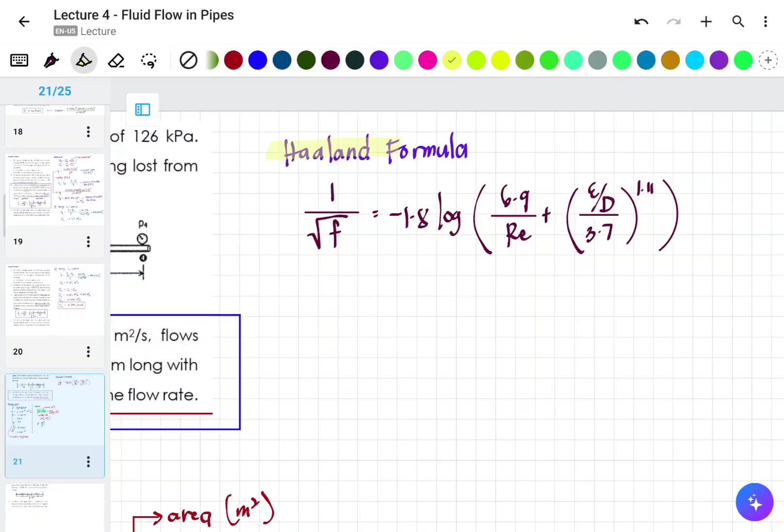Yan, so ginagamit natin yung Haaland, kaya siya binanggit, dahil yung Haaland kasi will give you almost the same answer ng using the Colebrook, pero ito without using the Moody chart. So lalapit tayo doon sa sagot. Pero yun nga lang, sabi sa atin ulit, meron daw tong 2% variation, in terms of the Colebrook equation. So ito yung formula natin, Haaland formula, huwag kalimutan.

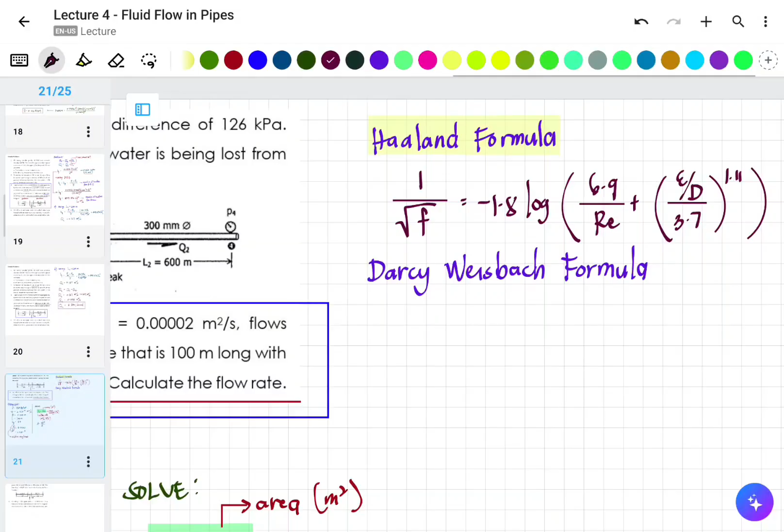Okay, next. So since binigyan tayo ng friction head loss, kailangan nating hanapin din yung isa pang equation na gagamitin natin. Ano yun? Which is the Darcy-Weisbach. Kasi nga, binigyan tayo ng ating head loss. So ano ba ang Darcy-Weisbach? That is head loss due to friction is equal to FL over D multiplied by V squared over 2G. Ngayon ang tanong, sir, pwede ba naming diretsong gamitin ang 0.0826 FL Q squared over D raised to 5? Pwede naman, pwede nyo namang gamitin yon. Ang tanong lang is, makakompute ba natin, meron na ba tayo makakompute na Q doon?

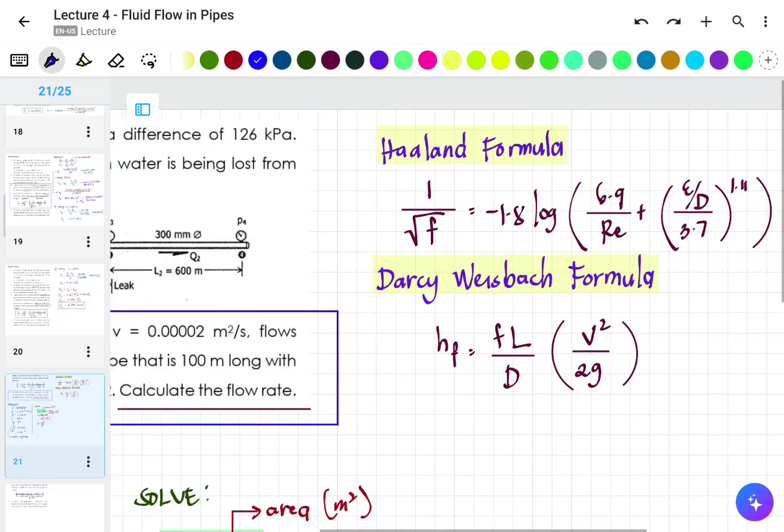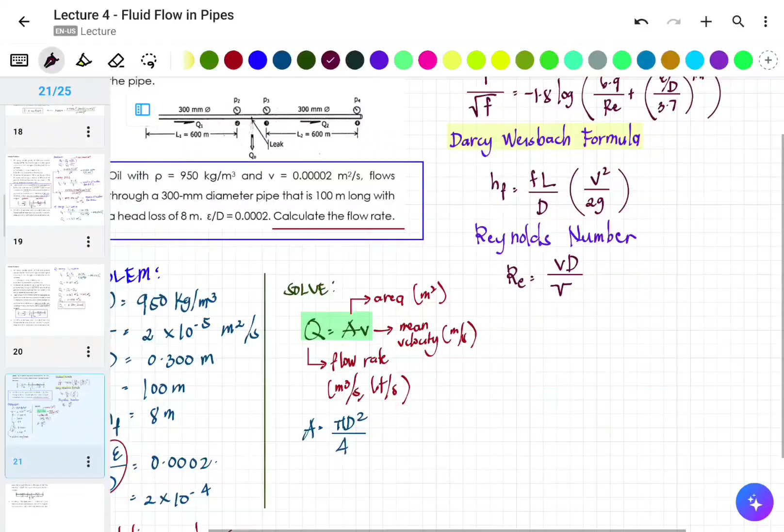Since we're given the kinematic viscosity, the Reynolds number RE is equal to VD over nu, or kinematic viscosity. So these are the three formulas we'll use: the Haaland formula, the Darcy-Weisbach, because we'll use them for the head loss and the Reynolds number.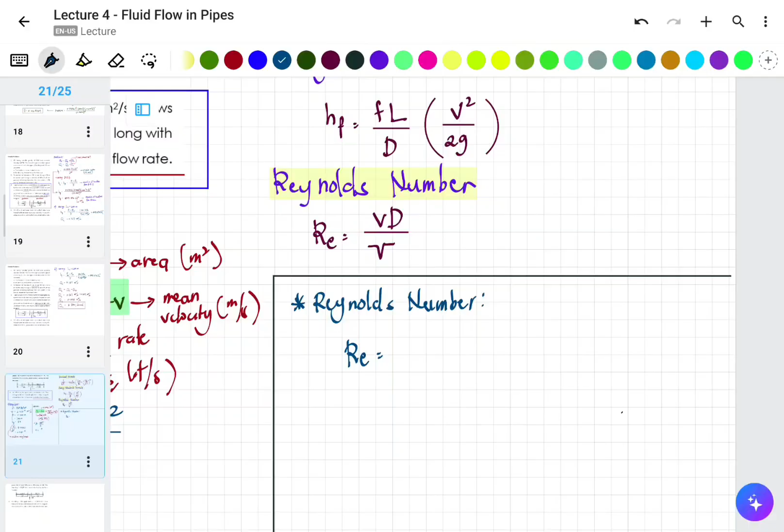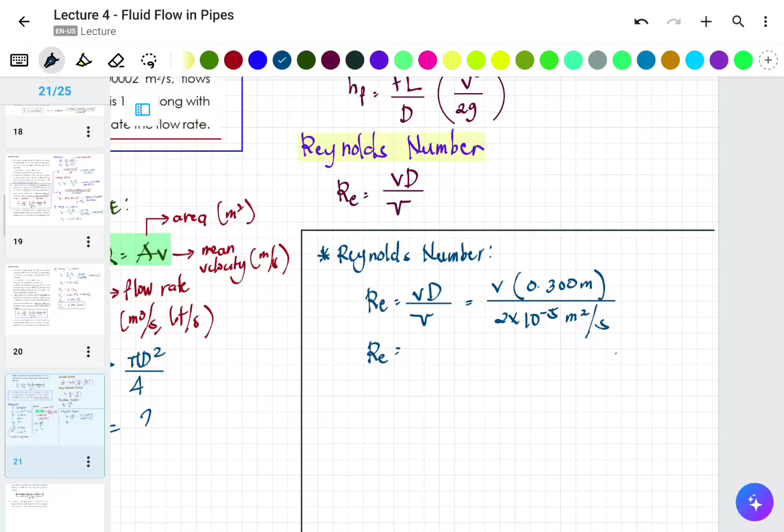So our Reynolds number is R sub E, that is VD over nu. We don't have the velocity, so our velocity is unknown, V multiplied by 0.3 meters, over kinematic viscosity, which is 2 times 10 to the negative 5 square meters per second. So our Reynolds number will be in terms of the velocity, so it's in terms of V. That equals 15,000 V. So the velocity is unknown to us.

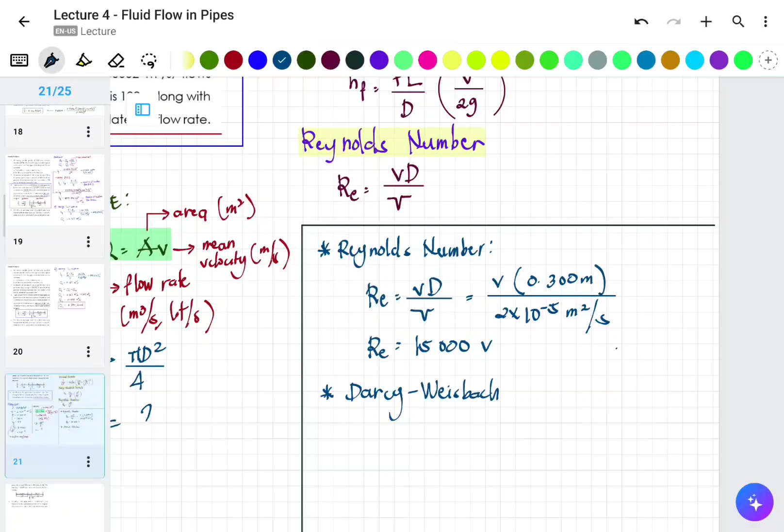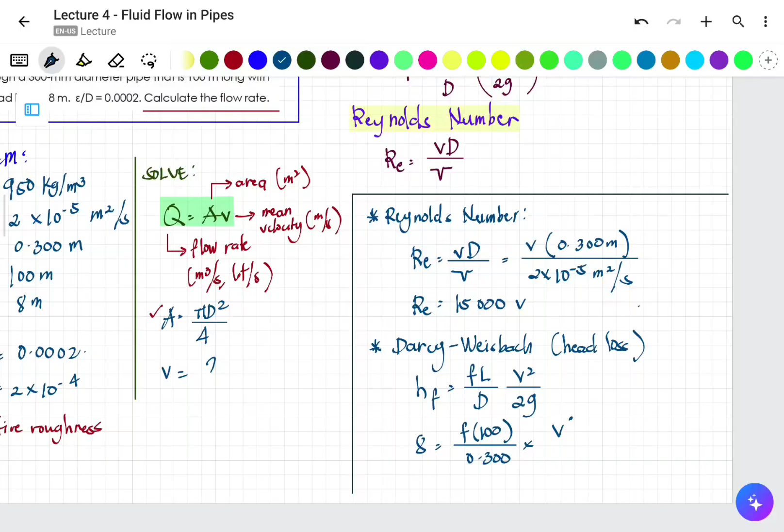Next, let's use the Darcy-Weisbach for the head loss. We're given the head loss value, but we don't have F, right? So this becomes Hf equals FL over D times V squared over 2G. We're given a head loss of 8. So 8 equals F, which we don't know, times length, which is given as 100 meters, over the diameter of 0.3, multiplied by V squared, which we also don't know, over 2 times 9.81.

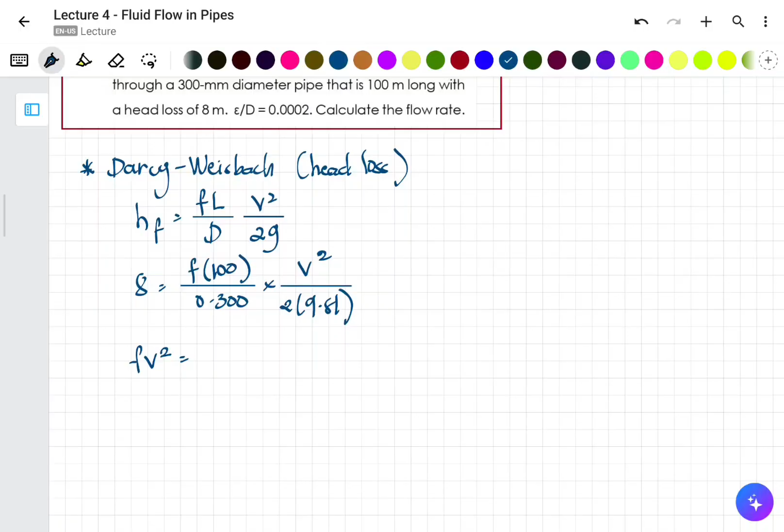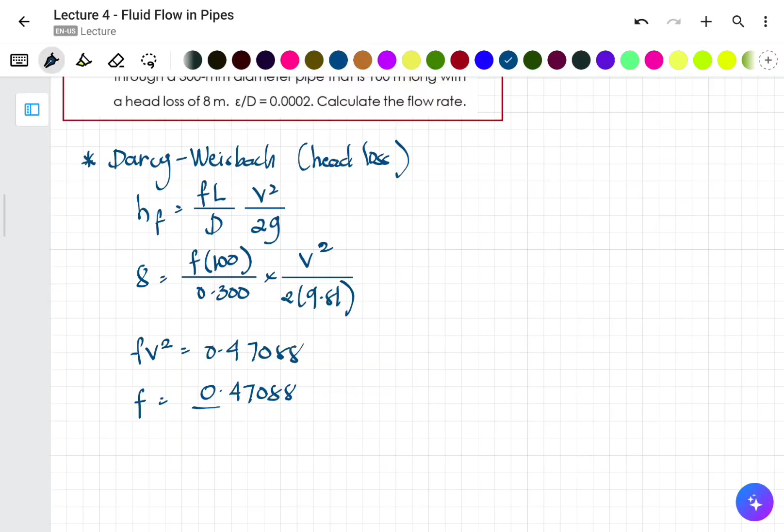This equals 0.47088. So F here is equal to 0.47088 over V squared. So from those two formulas we solved earlier and this one, we now have this, which I'll box in green because we need to get this. Our RE is in terms of velocity, 15,000 V, and our friction coefficient is 0.47088 over V squared.

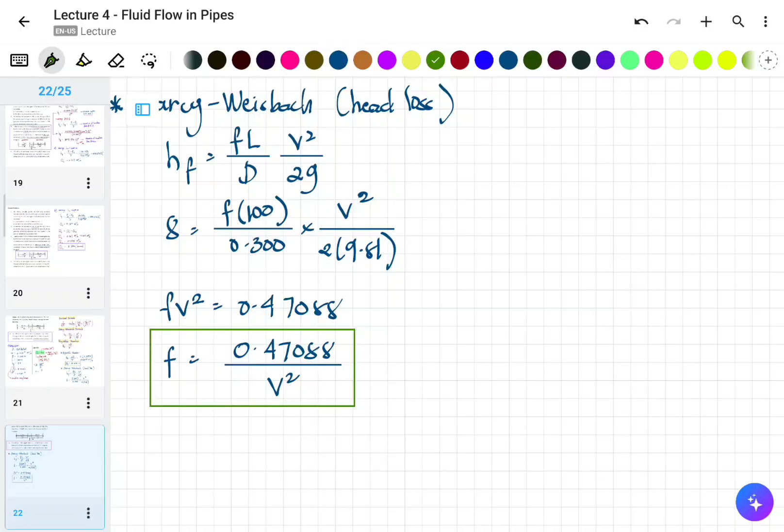1 over square root of f is equal to negative 1.8 logarithm of 6.9 over RE plus, quantity, epsilon over D over 3.7 raised to 1.11. So we can substitute directly.

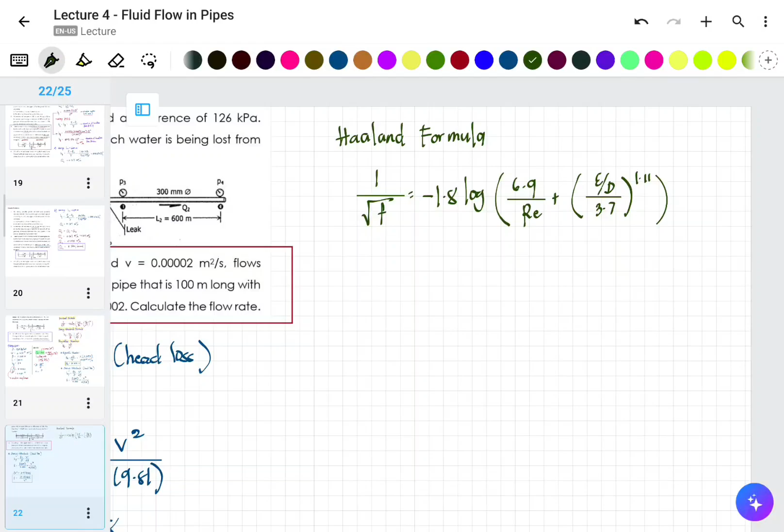How? This becomes 1 over, what was our square root of F again? Our F is 0.40788. So 0.40788 over V squared equals negative 1.8 logarithm of 6.9 over, what was our RE in terms of V again? That's 15,000 V. So 15,000V plus, that is epsilon over D, or 0.0002 over 3.7, raised to 1.11.

Okay, now sir, how do we do this? We have two unknowns. Since we have a value, you'll notice this is inside a square root and in the denominator, meaning this value will give you two possible values for V. But since we're dealing with iteration, you can't just set V equal to 0, it has to move. What I mean is, if you enter this equation into your calculator...

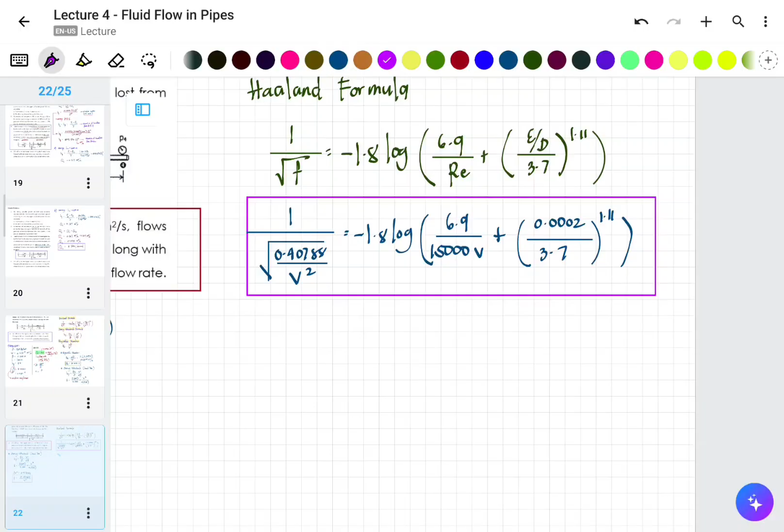The calculator will ask you to enter a value for V, or if you dictate it to your calculator, it will ask for the value of X. So you can't input a value of 0. Therefore, the value you enter should be greater than 0, meaning it should move, it should have a velocity value.

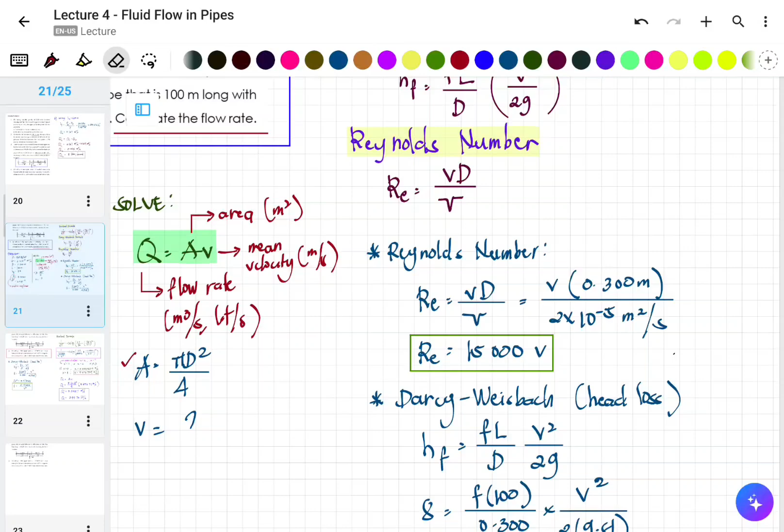Remember, you can't input a velocity of 0 into your calculator, because your velocity has a known value. So that is for our problem involving friction head loss with relative roughness.